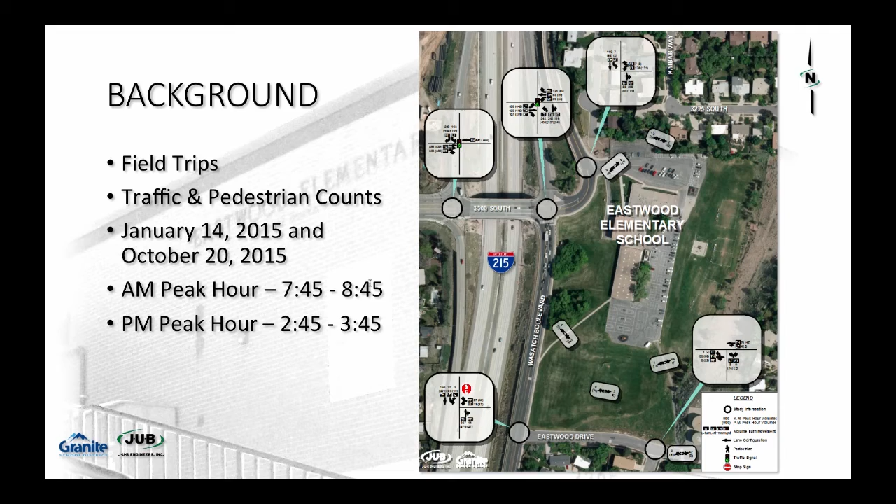Field evaluation of existing traffic circulation as well as traffic data collection were conducted on those proposed dates. But in addition to looking at those studies, there were also some critical rules or considerations for the design that ultimately eliminated a lot of proposals that came through as part of other input that we've received from the community. And we've looked at a wide variety of potential alternatives for this drop-off, but we needed an alternative that met these criteria. The student drop-off will never require a student to cross traffic to reach the school.

That means that those drop-offs need to be designed for the students to exit on the right side of the vehicle directly onto a walkway, which will allow them to enter into the school property or into the school itself. We don't want them getting out of the driver's side of the vehicle, walking through traffic, walking through a parking lot, as is currently the situation, to be able to get into the school. Obviously provides enhanced safety for the students. The parent drop-off needs to be separate from the bus drop-off for a myriad of reasons.

The drop-off zones would not include parking, as this currently presents too many conflict points and hazards for our pedestrians, including students, and even our patrons walking into the school at the beginning or the end of the school day. We want the queue of waiting traffic to not back up into the public roadways and should reduce traffic backups in the surrounding neighborhoods. Currently, we have a situation where the status quo is providing a number of buildup on the south campus on Eastwood Drive, where parents are picking up and dropping off from that particular location to avoid the conflicts in the actual drop-off area on the north area of the school.

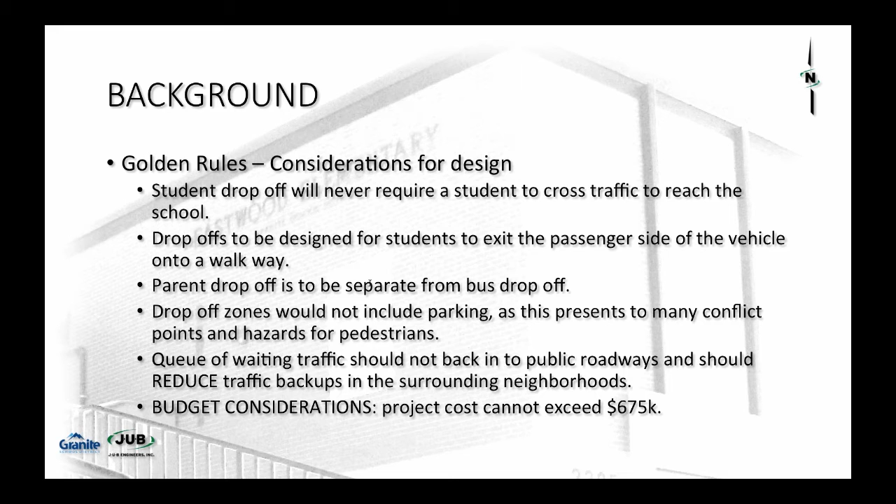So we're actually looking to take traffic off the roads and put it into this pickup drop-off zone or this drive-through zone. Last but not least, we do have budget considerations. Our project budget is $675,000, which is actually quite significant for this type of project. But considering the implications of the project, the property, and some of the issues there, we feel this is an appropriate budget.

To ensure the long-term viability of any of the improvements that we hope to make, the engineers forecasted through the year 2040 and assumed an appropriate amount of growth and maintained enrollment at the school. The white square charts indicate the amount and type of traffic at each respective intersection. These are difficult to read in this presentation, but the information will be demonstrated in some upcoming computerized traffic models that we'll show you towards the end of this presentation. So this is just to give you an idea of how the traffic study was conducted.

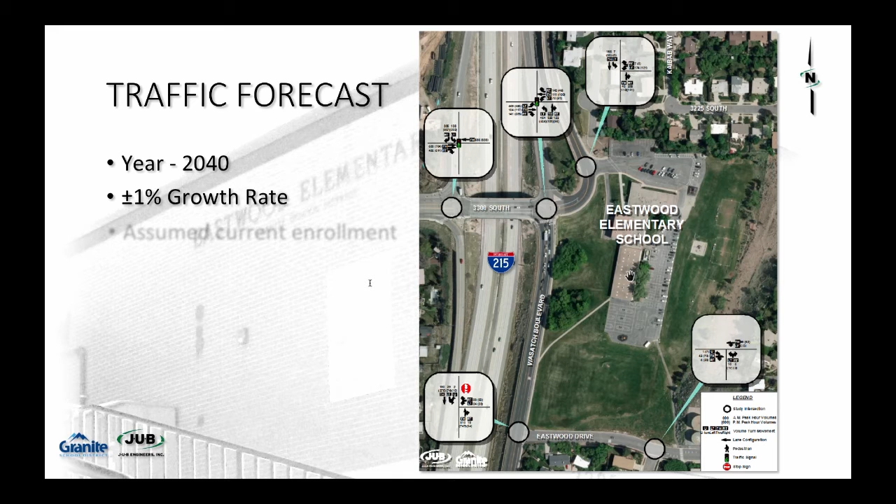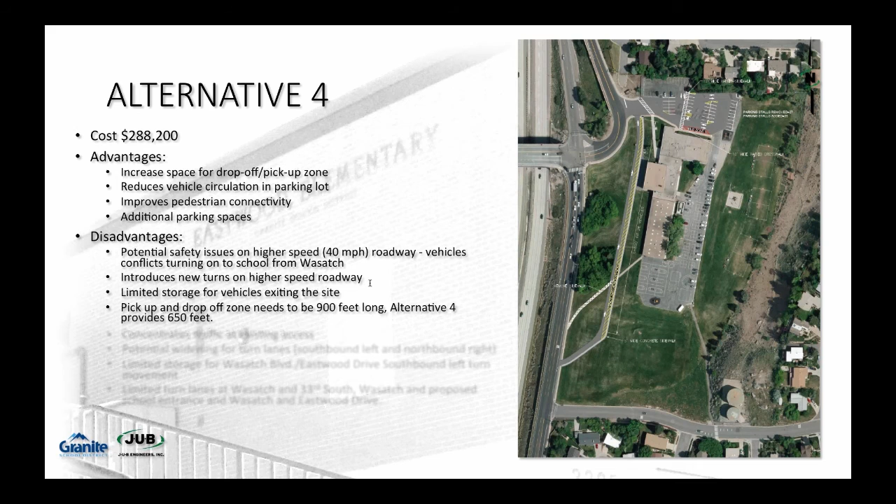Let's quickly review the final 3 proposals that met the bulk of the necessary standards for construction, or our golden rules. The first is entitled Alternative 4. The cost on this alternative is $288,000. It has several advantages that we need to consider.

Increase the space for drop-off and pickup zone. This is not the largest drop-off zone. It's only approximately 650 feet. We hope to get approximately 900 feet. This does reduce vehicle circulation in the parking lot, which is one of our stated goals, and improves pedestrian connectivity, and does provide for some additional parking spaces in the current parking lot.

However, it does have some potential safety issues. Of the 3 final alternatives that we are considering, this is probably the least safe because you are entering the drop-off zone from a high-speed roadway, and there are also additional conflicts that need to be considered at that particular intersection. There's limited storage for the vehicles exiting the site, and that drop-off zone needs to be at least 900 feet long, and this only provides 650 feet.

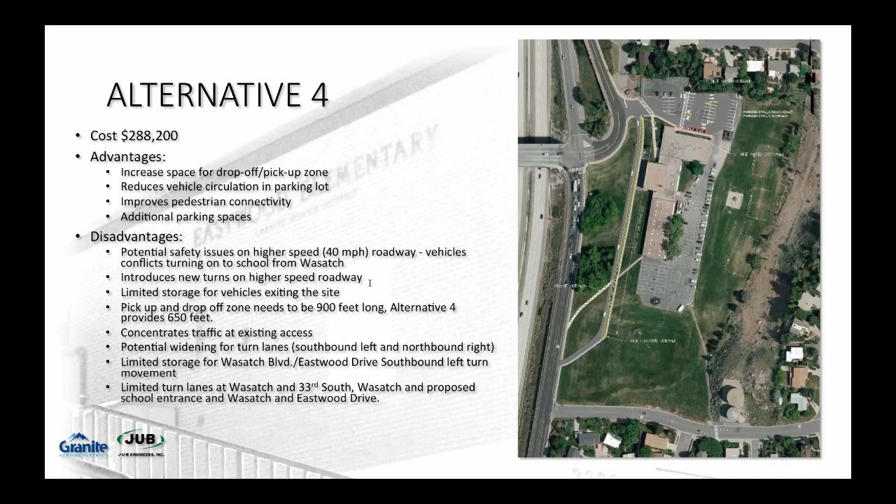As I already mentioned, there's a conflict point analysis. This particular new entrance would create 19 conflicts, 17 vehicle and 2 vehicle-bike. Higher speeds on Wasatch Boulevard are a consideration. The speed differential between vehicles and bikes is something to be considered as well. Also, with respect to the fact that we currently have traffic waiting on Eastwood Drive, this would not resolve those potential issues, as you will see later in the models.

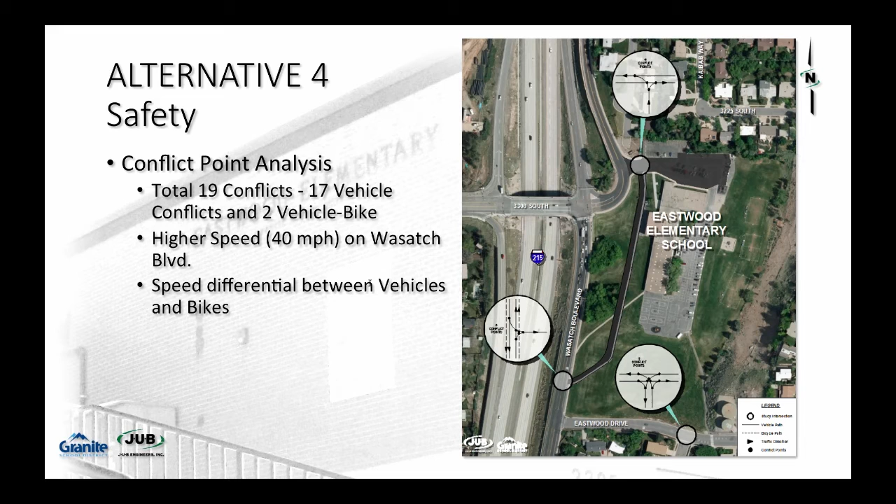Alternative 5A is modified from the original Alternative 5. The cost is approximately $670,000, which does meet our budget criteria. This has several advantages. It does meet the criteria and provides the highest capacity of any of the drop-off pickup zone alternatives, and so it does provide the highest amount of benefit. It does reduce vehicle circulation in the parking lot, again another stated goal, improves pedestrian connectivity, and some other advantages

as you see there. Some disadvantages are the potential vehicle conflicts on a low-speed, 25-mile-an-hour roadway, and we'll show you that a little more extensively on the next slide. Limited storage for exiting vehicles, similar to Alternative 4, and it concentrates traffic at an existing access. And there's a handful of vehicle-pedestrian conflicts that need to be taken into consideration, as you can see from the walkway coming off of Wasatch Boulevard that must cross, at some point, the new pickup drop-off zone.

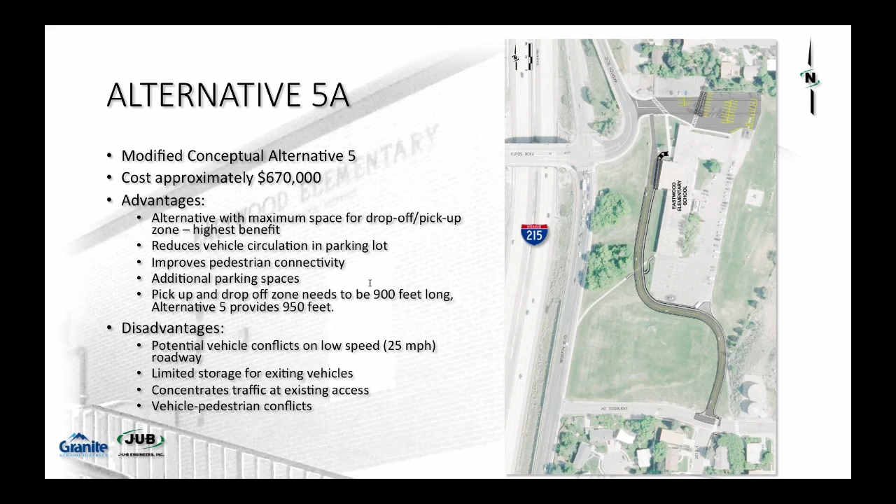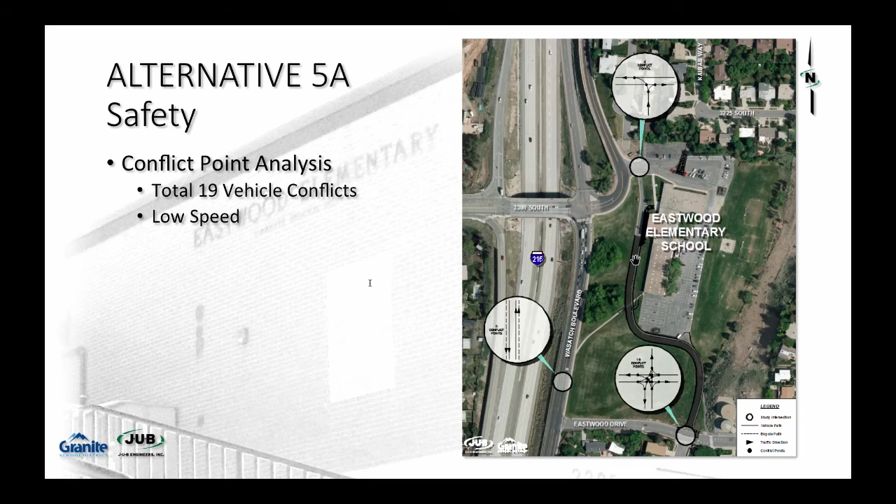As you can see, there's a total of 19 vehicle conflicts, but they are low speed. So this is slightly safer than Alternative 4 when that is taken into consideration. Alternative 6 is our most expensive alternative, coming in at a little over $900,000. It does have some advantages. The project need for the drop-off pickup zone is 900 feet. This Alternative 6 only provides 850 feet, so that's only a slight disadvantage.

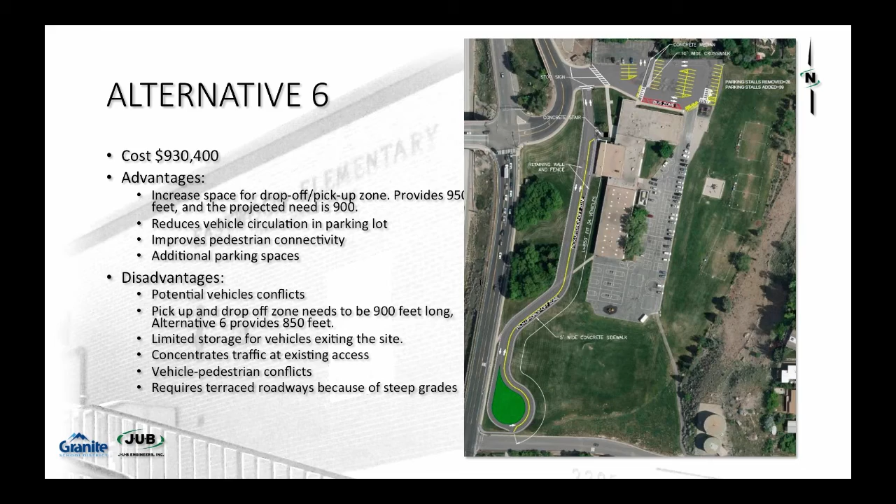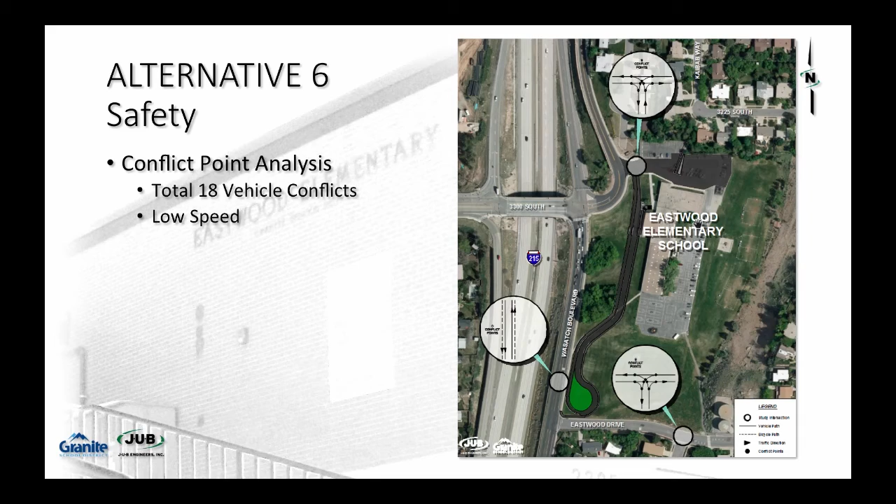I want to be clear that this drop-off and pickup zone does not enter or exit on either Eastwood or Wasatch, but only on that north portion off of the parking lot and the current entry to the school. Although the driveway does come close to those areas, it would not have any entry or exits to those roadways. As you can see, on the conflict point analysis, there's a total of 18 vehicle conflicts, but those are low speed.

So this is our first simulation of current traffic patterns. You can see there's no alternatives listed on the project. You can see the backup coming off of that roadway into the current driveway. That's backing up traffic all the way onto Wasatch Boulevard. In addition to that, you see traffic buildup on Eastwood Drive, which is currently the situation. One of our stated objectives or golden rules is that we reduce traffic on surrounding roads and put all that traffic into the pickup drop-off zone. Once again, this is what we currently have. This is status quo.

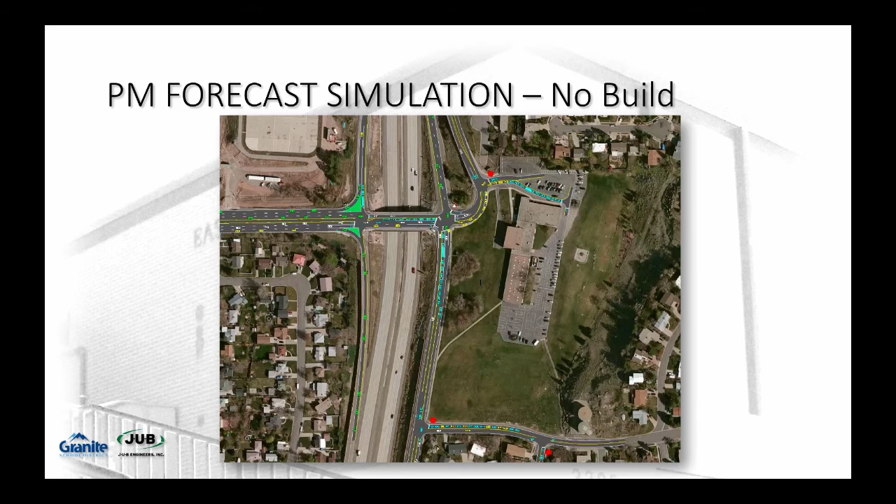This is alternative 5A's simulation. I apologize that the video software does not allow for the full alternative to be laid out, but the effect is the algorithm still works and the traffic patterns are still representative of what would occur. It's just a software issue in terms of how they put these types of videos together.

As you can see, there are no traffic backups on Eastwood, Wasatch, or any other surrounding roadways. There are no traffic backups into the existing parking lot. And the bulk of that traffic is maintained in the pickup drop-off zone itself.

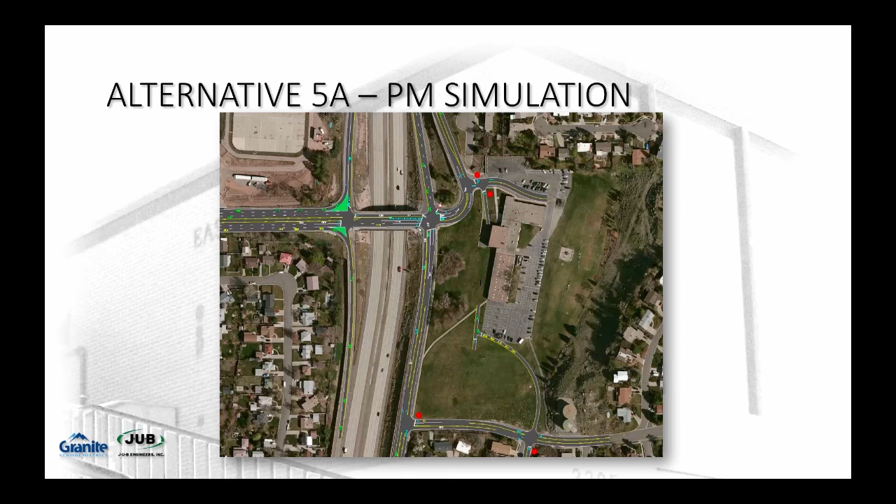This is alternative 6's simulation. This is the one that comes in and out of our current driveway on the north end and loops down in the southwest portion of the campus. You can't see it again because of some limitations on the software, but the traffic patterns are representative of what would occur in surrounding streets and in the pickup zone itself. So as you can see, there's a limited amount of traffic backup on Wasatch. There is still traffic backup on Eastwood Drive.

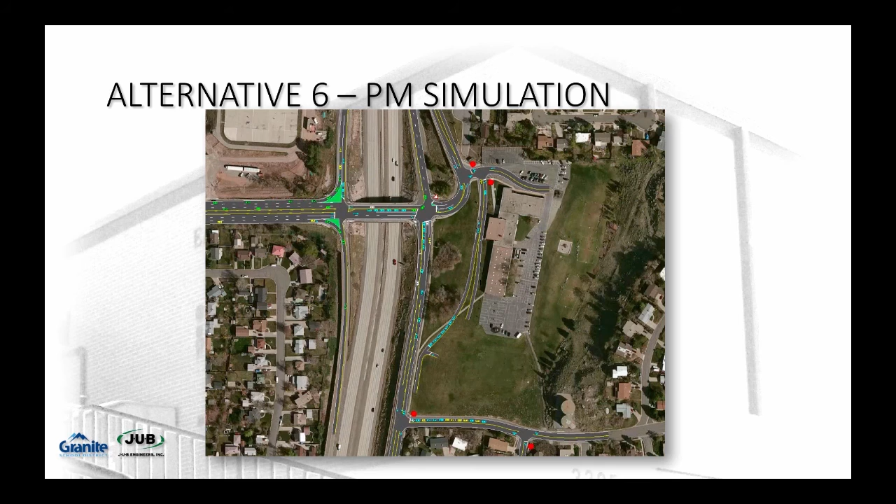In reviewing these 3 alternatives, which again represent the 3 alternatives that best met the conditions of the project with respect to safety and traffic and the cost, as you can see, this is how well they met what we previously referred to as the golden rules. This chart can also be found on your handouts and is probably read a little easier there.

As you can see, alternative 4 meets our cost objectives, but only minimally meets our safety and traffic objectives. Alternative 5A meets most of the objectives in terms of safety and traffic, and also meets our budget guidelines. Alternative 6 only partially responds to our safety and traffic objectives, and does not meet our budgetary constraints.

This information is important for you to consider. These are what the district will be looking at in terms of prioritizing these projects, in addition to the input that we received from this evening's meeting.

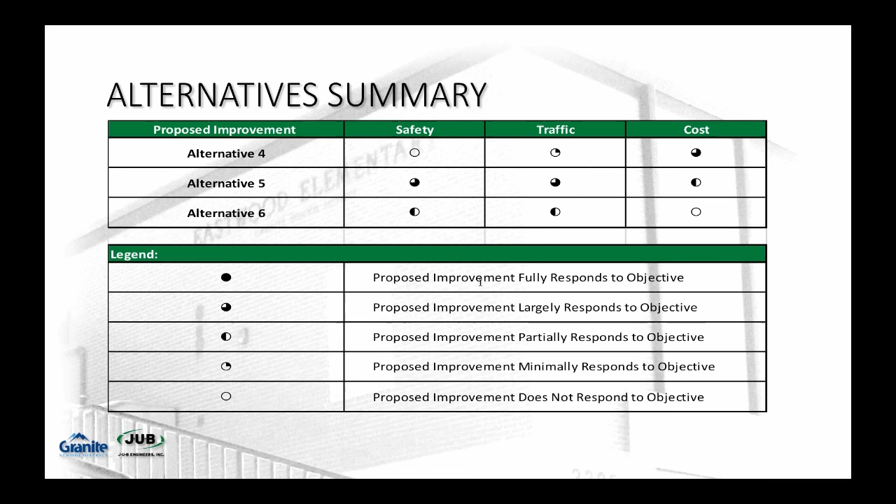If you have questions about how this traffic engineering works, or how this study was conducted, we have a representative from JUB Engineers. This is his contact information, and he is more than happy to receive your phone calls or your emails. We do have representatives from JUB Engineers here tonight, and you can also address your questions to them.

Most importantly, to provide feedback to the school district on these proposed alternatives, we would request that you either turn in your handout form that has a little section that you can provide feedback on, to us in the designated box here at the school this evening, or you can just directly email us at this email address, communications@graniteschools.org. This information will be collated and received up and through November 9th, which is prior to the November 10th school board meeting, where we hope to be able to collate this information in behalf of the board.

Once again, we would appreciate any feedback you could provide the school district. You can email us, or you can write your comments down this evening and submit those to us physically. Again, we appreciate your attendance and your time this evening, and would encourage you to go review the posters a little more in depth, or speak with district, county, or JUB officials and get your questions answered if there are questions that remain.